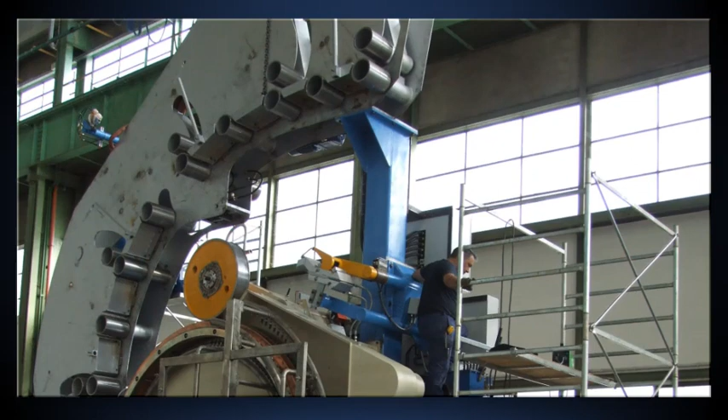Golden profit from copper scrap. On the outskirts of Milan, Italy, you will find the factory where Properzi S.p.A. designs and manufactures special equipment and complete lines for the production of non-ferrous commodities such as rod and ingots.

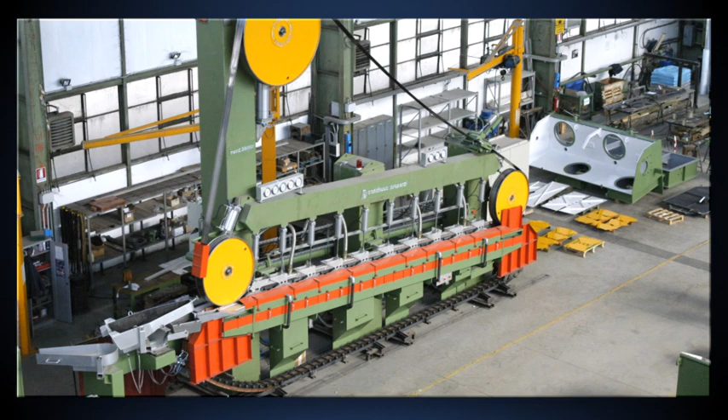Research and innovation have been the driving force of Properzi since its inception in 1947, when Mr. Properzi developed his patents pertaining to the revolutionary method of continuous casting and direct rolling of non-ferrous rod. Since that time, hundreds of Properzi rod lines, commissioned worldwide, have produced the vast majority of conductors that have shaped

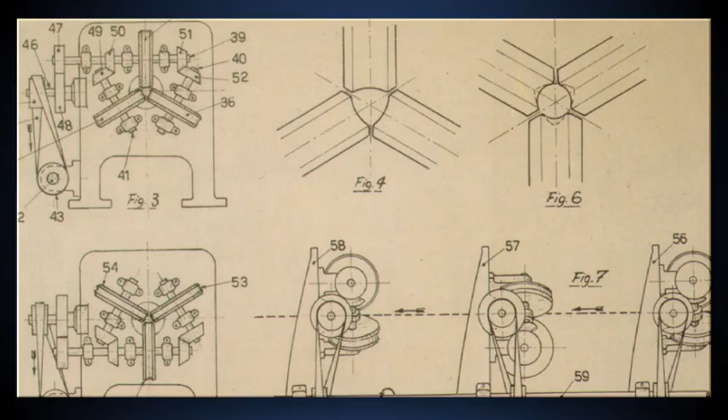our world. The design of our equipment is implemented using the most modern technologies available, for example 3D finite element method, and of course the skills of our expert designers who have extensive experience in this highly specialized sector.

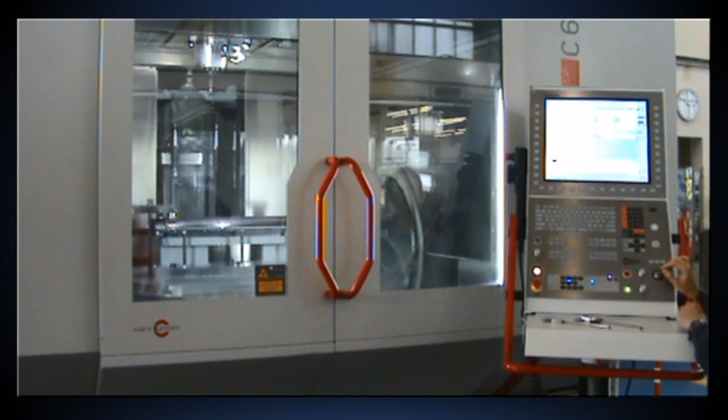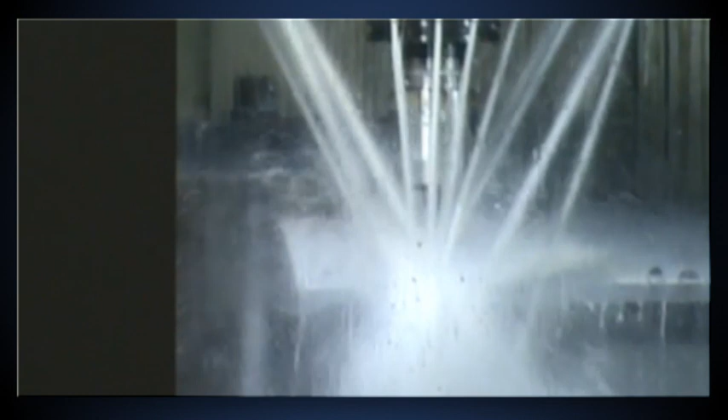Contrary to the general trend of European and American companies who have gradually shifted their manufacturing out of their countries, Properzi believes the achievement of the highest repeatable quality of the equipment is accomplished with a specific culture and sustained reinvestment. For this reason, year after year, the Properzi factory has been equipped with the most modern CNC computer numerical control machines, such as the new Hermle 5-axis CNC machining center.

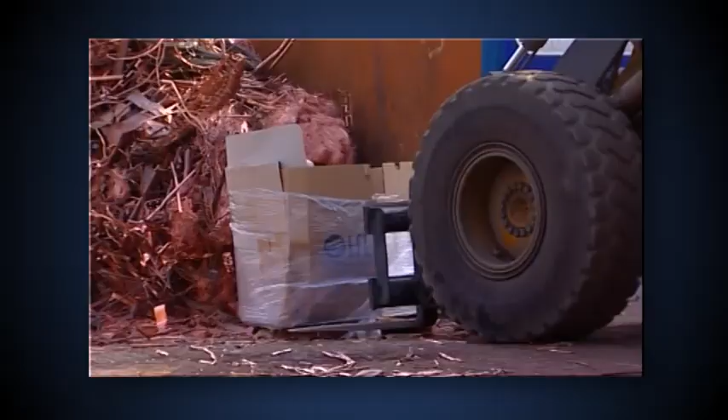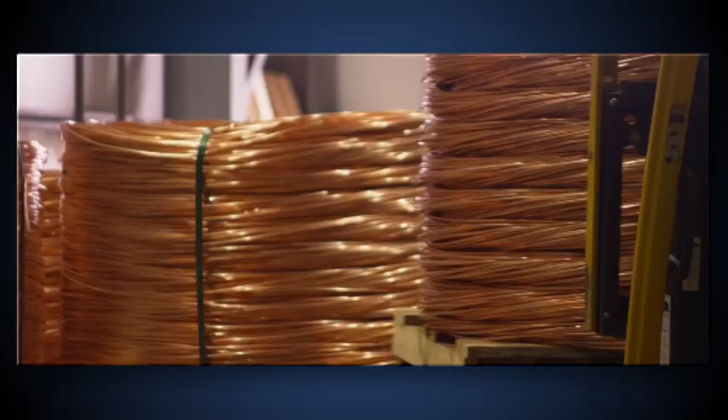One of the best evergreen achievements that we wish to present is the technology to resurrect copper scrap with a controlled quantity of impurities into clean copper. For many years, the worldwide industry has referred to copper rod produced using Properzi equipment as FRHC, fire-refined high-conductivity rod, although the FRHC copper has been successfully used for casting rod, billets, slabs, or ingots.

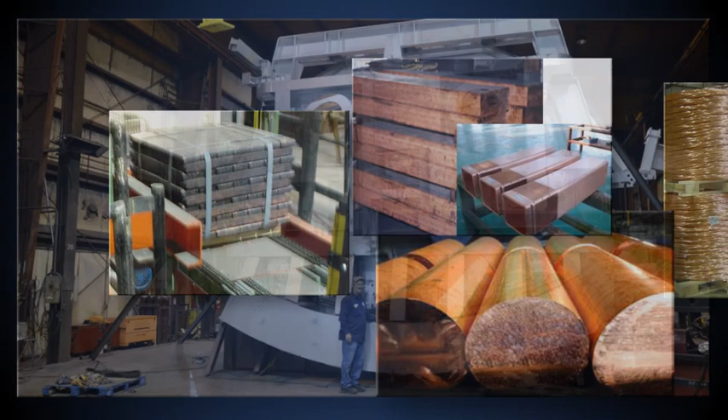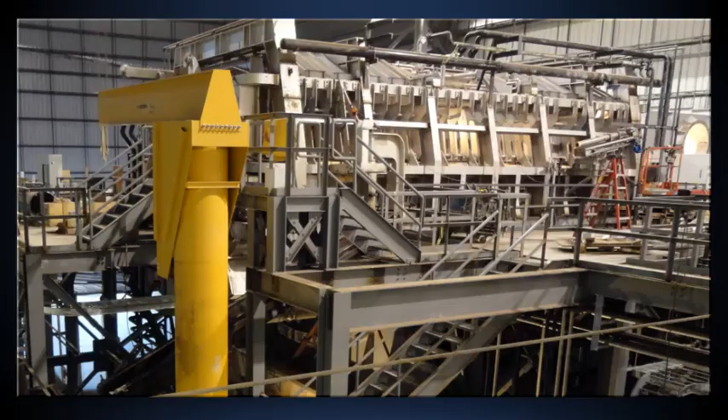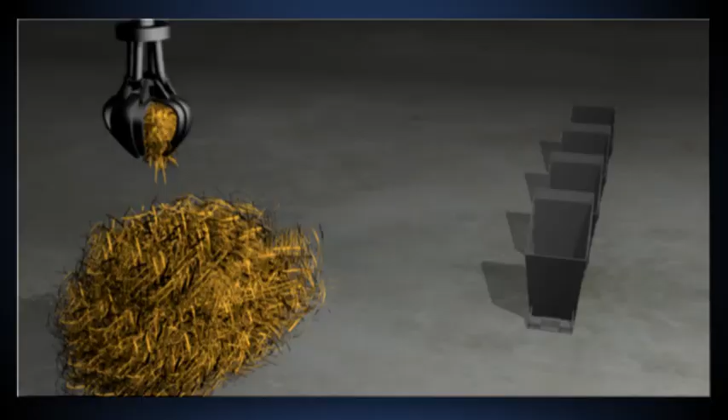Whatever the final application, the heart of the plant is one or more tiltable reverberatory refining furnaces with a nominal capacity ranging from the smallest 40 tons up to 250 tons or larger. The input material is 100% copper scrap, with a copper content higher than 93 to 94%, provided that harmful impurities such as nickel, tellurium and/or silver do not exceed certain values as detailed in the technical documents.

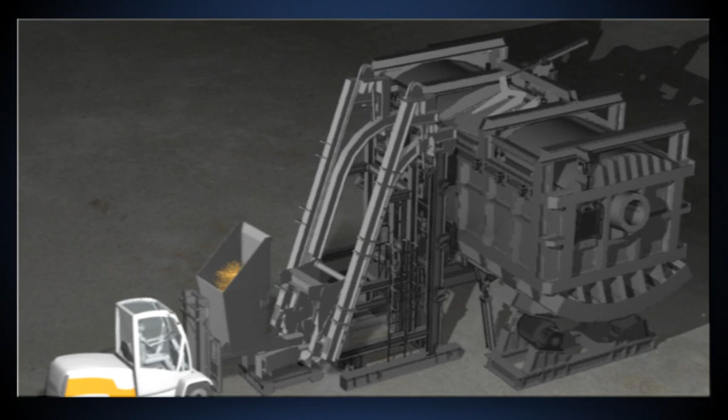This process can be extremely profitable, and you really can make considerable profit by turning low-grade copper scrap into FRHC rod. The copper scrap is loaded into appropriate buckets in either bulk form or compacted shape. These buckets are then transported to the furnace area and loaded one by one in the skip hoist that brings the container, the bucket, full of scrap from floor level up to the opening of the charging door.

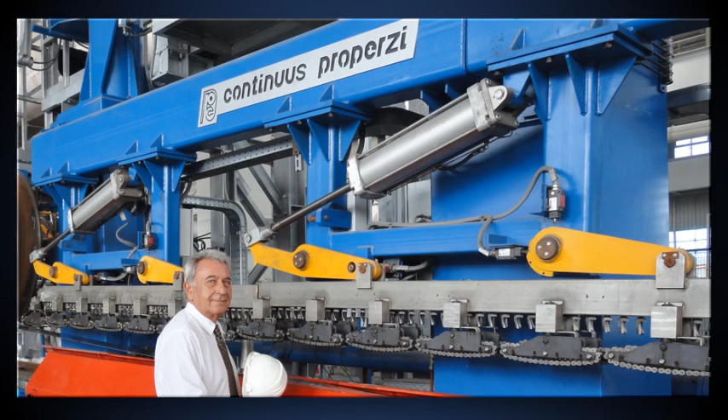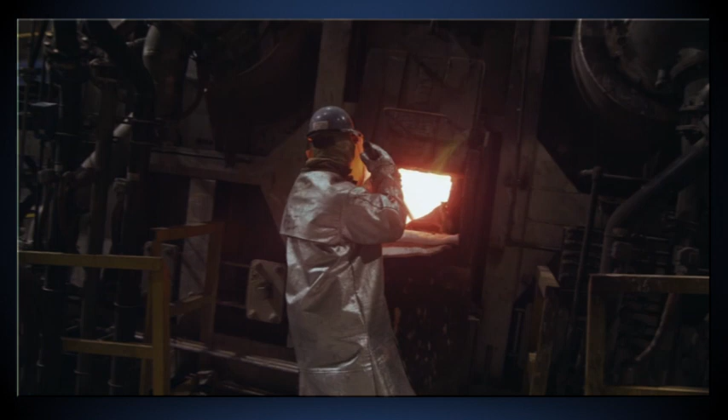In fact, a recent patent from Properzi facilitates the loading of the furnace from the top rather than from a lateral door, thereby creating greater thermal efficiency and limited fume emissions during the entire process. By taking advantage of the increased room within the furnace, due to the new position of the charging door and the geometry of the roof, a much higher quantity of scrap can be charged per loading cycle.

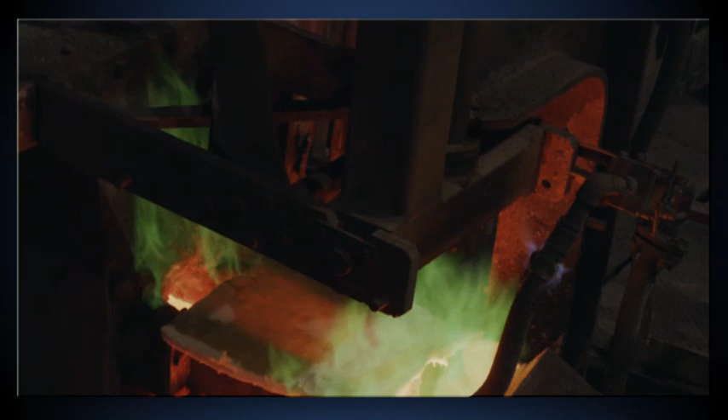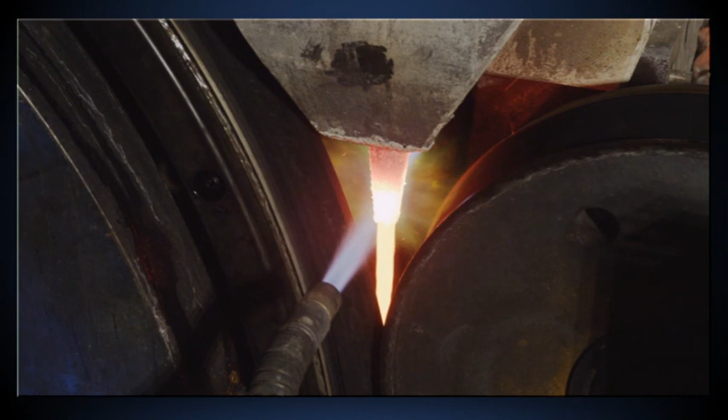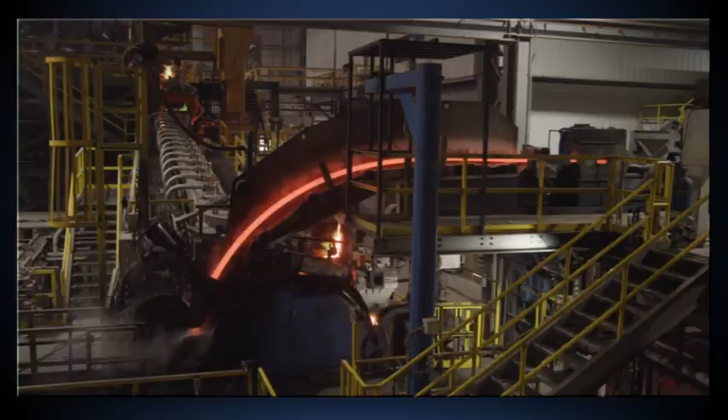Once the metal is ready for the casting operation, the continuous casting and rolling line starts its operation. The liquid metal is poured through the tundish into the vertical spout and then flows into the continuous closed mold determined by the copper ring mold and the steel belt, controlled by the most modern automatic level monitoring and control. The cast bar is automatically handled by the appropriate pressing rolls and conveyors during the transitory phases, and the process parameters are safely set from the HMIs, thereby making the operator's job easier than ever.

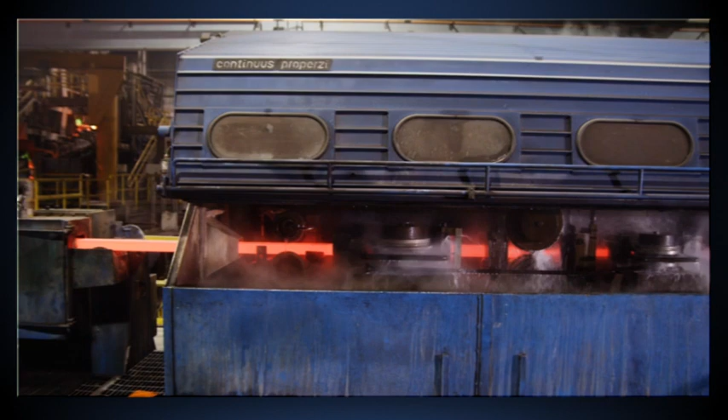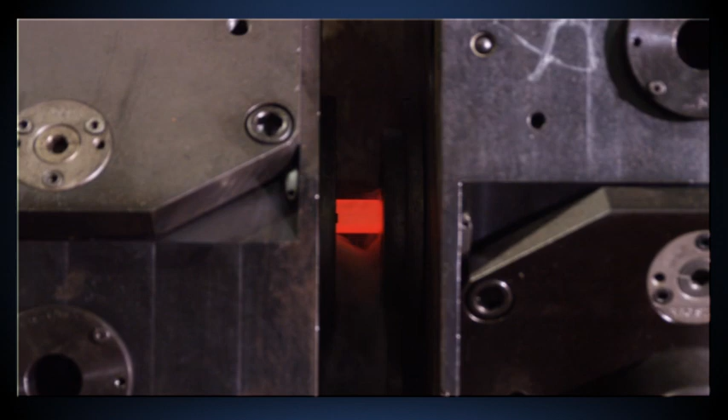The rolling operations are performed by a train of 2 rolling mills operating in tandem. The roughing mill uses 5 two-roll rolling stands exercising vertical and horizontal forces on the cast bar. It generates a very high reduction rate in the bar to ensure the proper internal structure of the copper rod to enhance the best drawability. The Model 11 finishing mill uses 8 traditional Properzi 3-roll rolling stands to produce 8mm rod. Larger diameters up to 22mm or greater can also be produced.

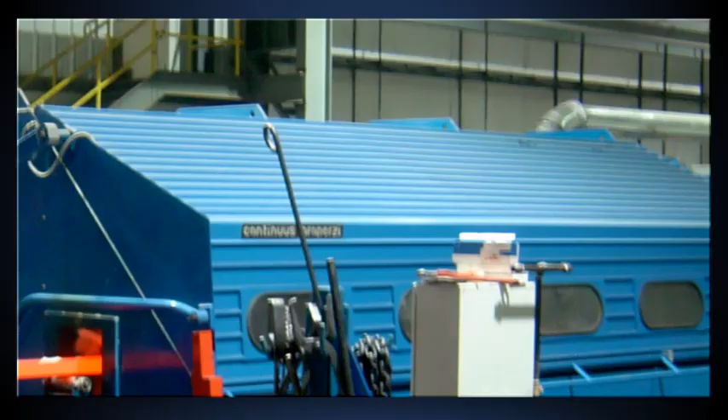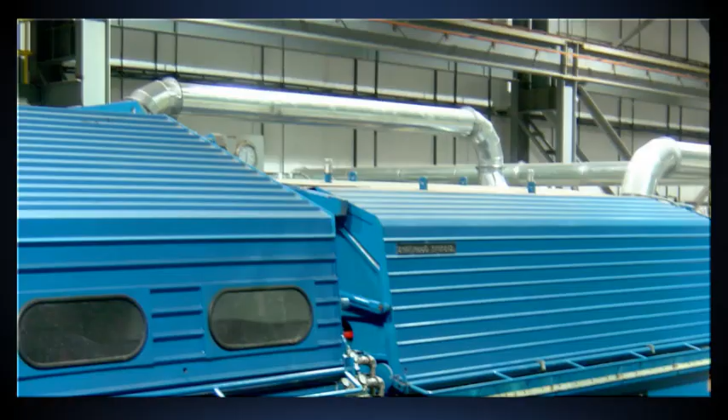Protection of the environment has not been neglected. To eliminate sources of pollution, the rolling mills are equipped with fume enclosures and access covers. When the access covers are closed, all fumes are contained inside the enclosures.

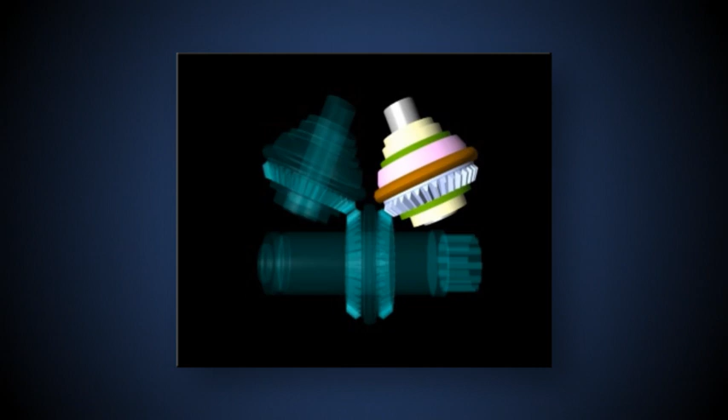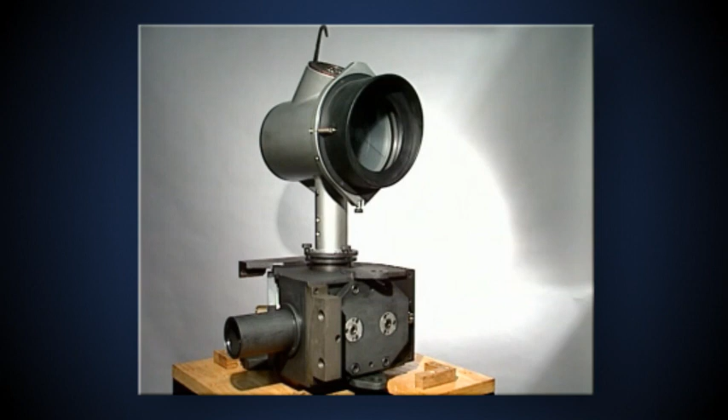The calibration operations of these stands are very easy and repeatable. After removing the stand from the basement, the gauging and alignment of the work rolls is performed by simply operating cams via externally mounted screws and by inserting proper shims into the shim housing without having to disassemble or remove anything other than the entry and exit guides to allow the installation of the special Properzi optical instrument and projecting lamp.

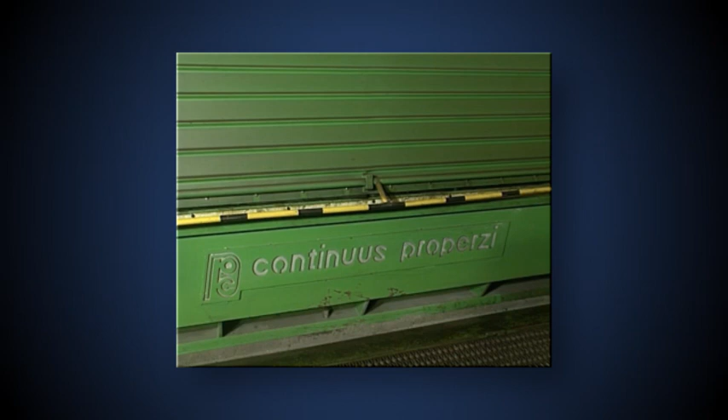The outlet guide of each stand is equipped with a special safety device that, in the unlucky event of cobble formation, immediately actuates the electrodynamic stopping of the rolling mill to prevent further cobble propagation in the preceding stands.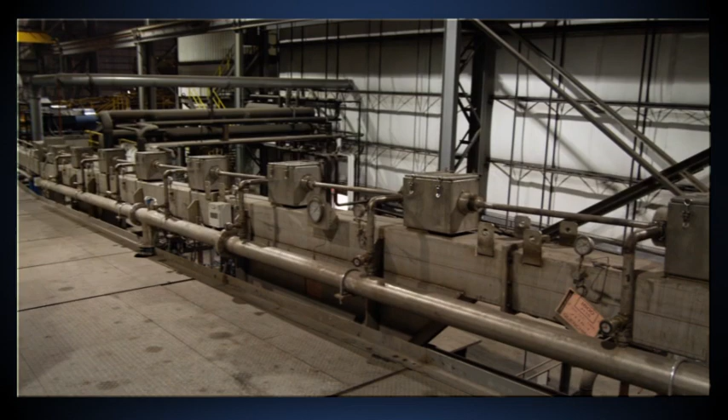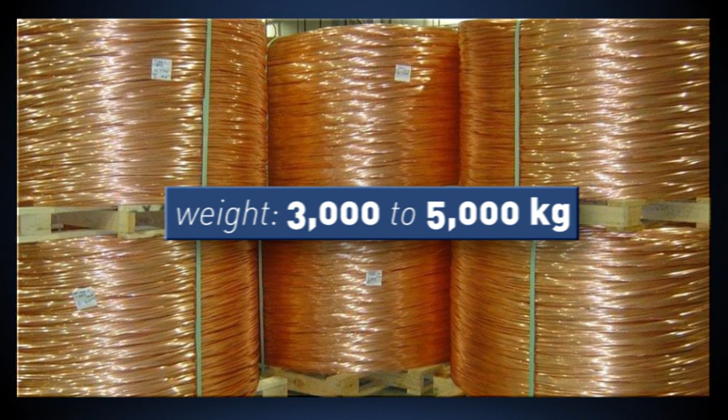After leaving the finishing mill, the rod passes through a pickling device and is then inline water-cooled before passing through a state-of-the-art flaw detector. The rod is coiled in a fully automatic basket coiler where both concentric coils and rosette-type coils can be produced. The coil dimensions are weight 3,000 to 5,000 kilos, outside diameter maximum 1,800 millimeters, height approximately 950 millimeters. The coils, once produced, are processed through the automatic inline pressing and strapping device.

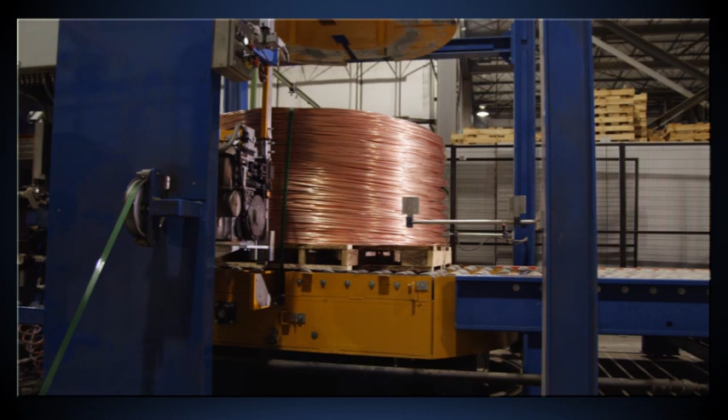Such rod can be used for at least 95% of all copper wire required by current markets and is normally drawn with multi-wire machines down to 0.3 millimeters. The number of wire breaks per ton until reaching this diameter will be comparable in all respects to the best copper rod available on the market by making minor adjustments during the annealing process.

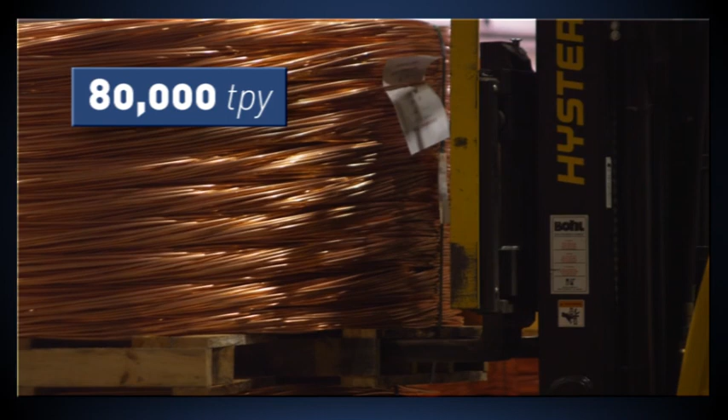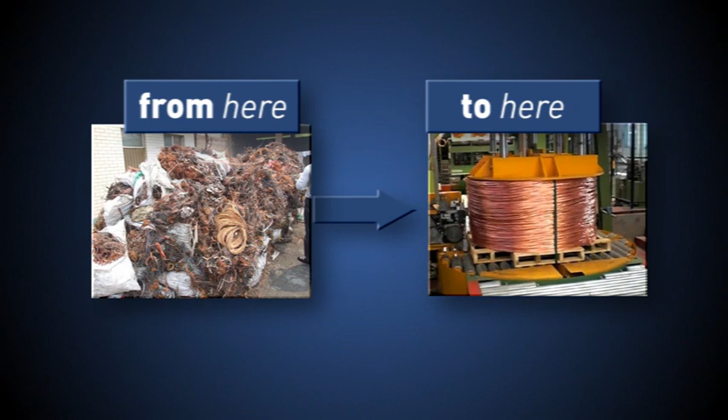Commercial plant capacity ranges from a minimum of 8 to 10,000 tons per year to 80,000 and above. The combination of 2 refining furnaces and eventually the vertical melting furnace for cathodes gives a further boost to the annual output. During the past 25 years, Properzi has commissioned some 27 plants worldwide that produce FRHC metal, mainly for rod, but also for billets and slabs. You can make considerable profit by using FRHC Properzi technology.